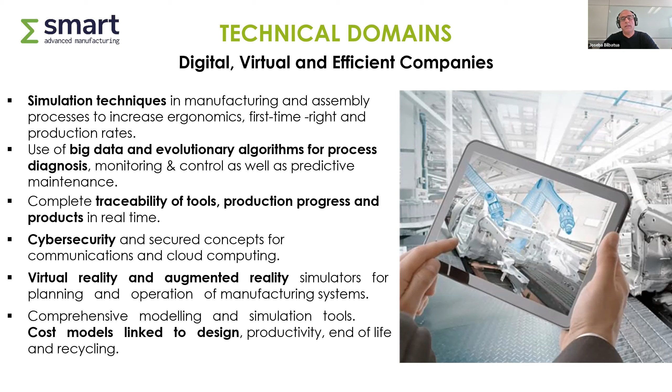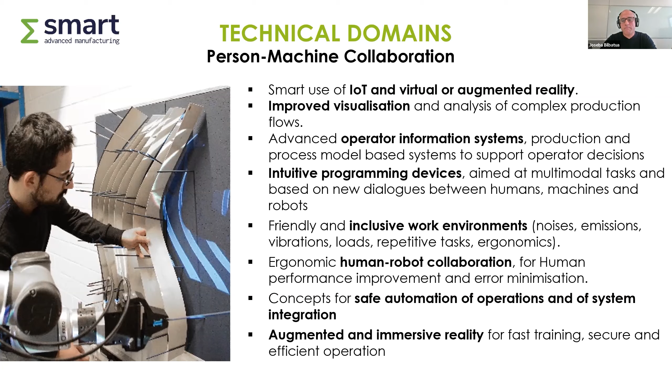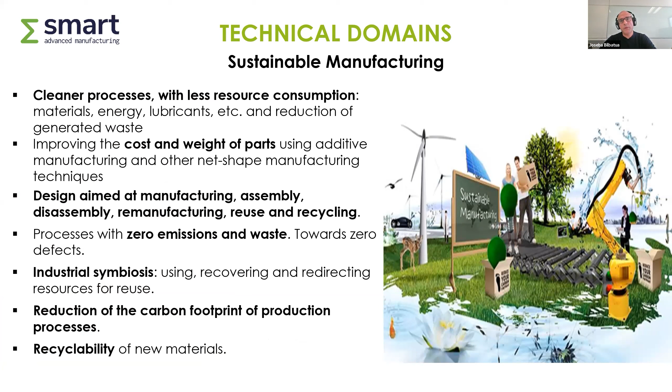A fifth domain is sustainable manufacturing. Originally we thought of this domain for manufacturing technologies that could contribute to less energy and raw material consumption during machining and manufacturing. But we would also like to include in this sustainable manufacturing domain all technologies around reusing, recycling, remanufacturing - the circular economy applied to the manufacturing scenario could also be included here.

Finally, the sixth domain, we call it customer-based manufacturing. In this domain we include all those relationships and interactions that could come from the different stakeholders of the value chain, from the raw material provider up to the end user, the technology suppliers, and all those business opportunities that could arise from this collaboration along the value chain. So these are our six technical domains.

Of course the SMART projects could deal with several domains at the same time - we are not asking projects to focus on just a specific domain. But as you will have seen, we have defined the technical domains quite wide and broad in order to follow this bottom-up approach and to be able to respond to the needs and priorities of the companies.

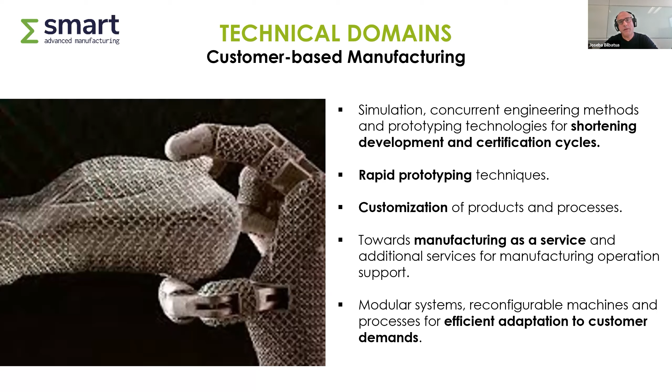Finally, the budget in the consortia has to be balanced between the participants and also the countries involved in the consortia. That means, of course, we can have different participation of partners and countries in the budget, but this has to more or less well justify the activity and participation of the different partners.

In SMART we are following a two-stage approach for submitting proposals. As you know, we are still in the project outline, which is the first stage. I have to say that this is not a go, no-go phase, so all the projects will be evaluated in a positive way. The idea is that our feedback will be recommendations and suggestions on how the proposal can be more successful in the full project proposal stage.

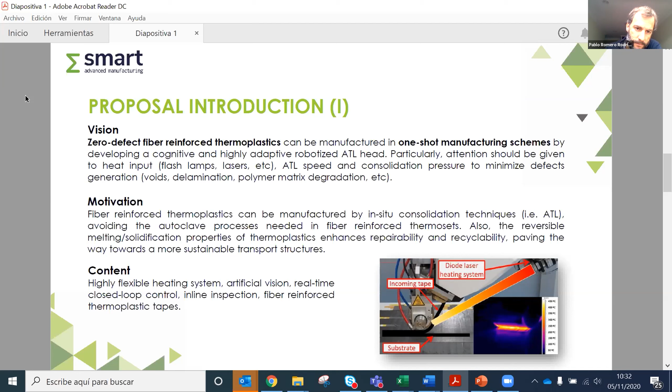Regarding outputs, there is not a lot of technology for online inspection of composites during this manufacturing process. So we see here a good outcome related to ultrasonic detection or other technology.

Another outcome is zero defect manufacturing by in situ consolidation. I mean, this is the title of the project, but it is not achieved currently, so we envisage this outcome as a potential result.

And the increase of manufacturing rate as well, since we are going to come up with more flexible ATL manufacturing processes, we will have more design space and increased manufacturing rate.

Regarding impacts, I will highlight this flexibility to consolidate thermoplastics in the transport sector, to introduce new complex parts in this sector and others, and also enhance overall the possibilities of lightweight materials in different sectors.

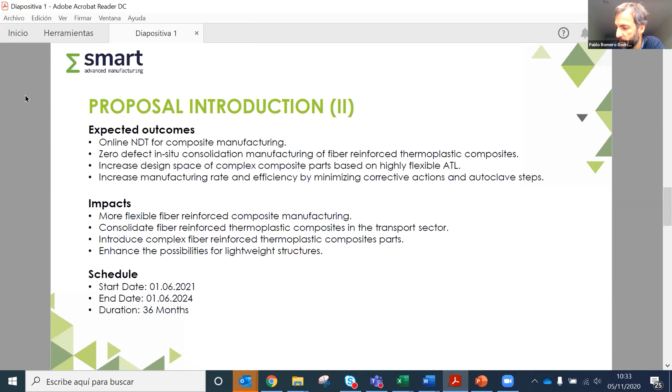This is a 36-month project, and talking about partners, we are mostly focusing on ATL head manufacturers and fiber reinforced composite tape manufacturers. Machine vision we also have at AIMEN, but we are open to collaborate here as well.

And that's my contact point. I'm open to talk to you, and thank you very much for this opportunity.

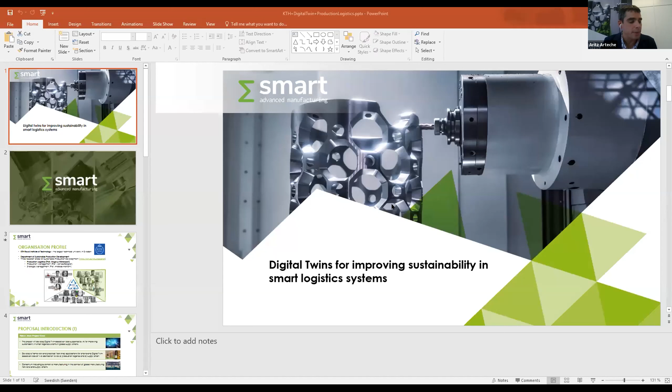Good morning, thanks. Hopefully you get to see my screen. Yeah, we do see your screen. Great, thank you.

My name is Eric Flores. I am a researcher at the Royal Institute of Technology in Sweden. And I am very grateful to have this opportunity to present our idea, which we've named Digital Twins for Improving Sustainability in Smart Logistics Systems.

Who are we? The Royal Institute of Technology is Sweden's largest technical university. I work for the Department of Sustainable Production Development, and we are focused on three research areas, of which I am a member of production logistics, led by Professor Magnus Wiktorsson. The core of our work really is helping manufacturing companies improve logistics competitiveness through smart technologies, and we do so through a sustainable perspective.

Which leads us to the proposal and the vision of our project. In this project, we wish to help manufacturing companies of the automotive industry develop a digital twin. In particular, what we are targeting is services that can benefit operators, logistics managers, and factory management.

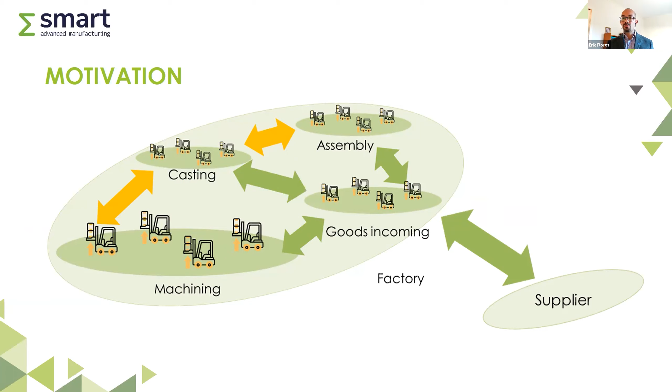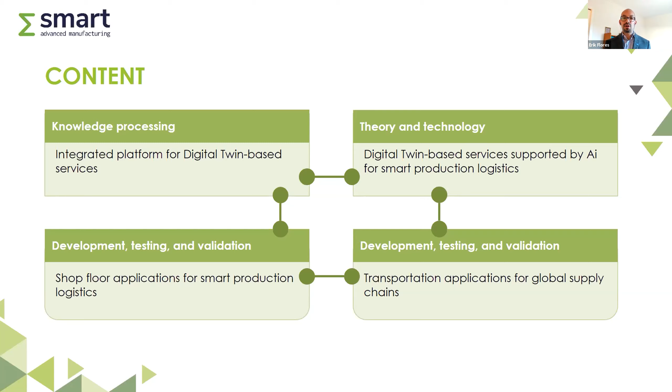This is a very broad scope of what we are trying to achieve in providing a digital twin powered by AI that contributes to how logistics is handled inside the factory and its interface. As part of this project, we envision developing, testing, and validating at the shop floor application, but also contributing new developments of technology. We have outlined certain outcomes that can benefit manufacturing companies and IT companies. I would like to highlight that, as opposed to what is currently being done—providing solutions to the customer end—we are looking towards the factory itself.

As far as market impact goes, the KPIs that can contribute to factory improvement include energy efficiency, makespan, and delivery of products. But in addition to that, we're also targeting social, environmental, and economic aspects of sustainability.

We're aiming for a 3-year project in which we collaborate with all partners. This is fundamental for us. Currently, we have partners in Sweden in automotive and AI, and we also have partners in Korea. But we wish to extend our network, particularly if you're from the automotive sector, a supplier, or an IT company. I thank you all for your time, and I am very grateful to hear more from you.

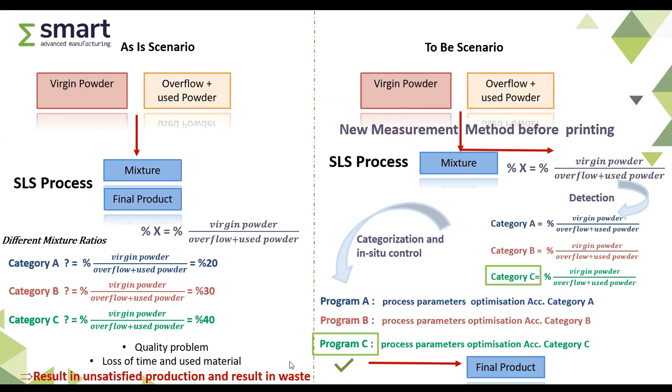So with these systems, we are expecting quality problems can decrease, resulting in saving time, production time, energy, and printed material powder can also be used well. Then scraps can be decreased.

Also, because non-used material can be a problem for environmental issues, with this process improvement we can achieve a good environmental solution. Optimum process parameters can also help for serial production spare part applications.

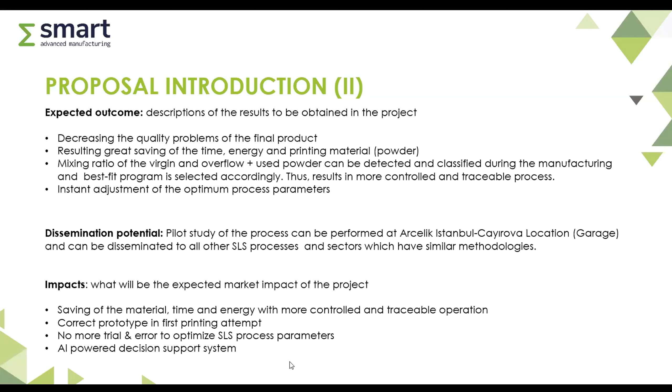Pilot study of the process can be performed at Arçelik facilities. We are located in Istanbul, Çayırova location. In our garage laboratory, we have two different SLS polymer machines. We are also experienced with FDM and other printing technologies. So with this project, we can modify our machine accordingly and make some trials.

So we're searching for partners with the ability to understand material property classification and understand the good levels of the material. Also, the partners should provide sensor-based or camera-based systems to understand the best fitted parameters and situation of the material. Then, communication of the machine with this sensor-based or visual control system, and this integration with the machine and parameter selection manual system, can be explored. With this aim, we need partners too.

Thank you, Ibrahim. We had a little bit of noise in the background, but finally, I think the presentation was good. And finally, we're moving to Ireland with the IMR team. Fergus Culligan and John Mullaney are going to introduce us two project ideas that they have prepared.

Good morning, Fergus. Good morning, John. The floor is yours for you to begin. Morning, Aritz. Thank you for that.

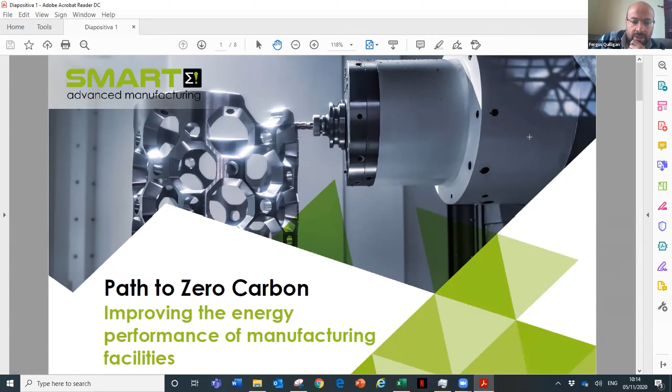So the project I'm talking about here today is A Path to Zero Carbon. It's about improving the energy performance of manufacturing facilities. About Irish Manufacturing Research, we're a not-for-profit research and technology organisation to help Irish manufacturing innovate. We're about 80 people, mostly researchers working in data analytics, industrial Internet of Things, sustainable manufacturing, intelligent buildings, automation, advanced control, circular economy, software engineering, amongst other things.

So the proposal I'm proposing here today is around the application of renewable technology and AI to support the demonstration of a zero carbon building. The motivation of this is to develop intelligent energy services to demonstrate reduced carbon for factories, especially legacy factories. The content of this is around the application of AI to monitor and enable advanced real-time optimization through integration of intelligent metering and control systems.

It's also to include research into federated machine learning and fog compute architectures that can integrate energy and natural resource consumption and response strategies into productivity, consumption, and behavior for factories. It's also about developing energy-aware buildings by jointly optimizing consumption costs, occupancy comfort, and CO2 reductions, and looking at connecting digital technologies to integrate distributed renewable energy sources with bidirectional charging functionalities to enable neighborhood optimized storage, including management systems for optimal integration, flexibility, and interoperability with the grid itself. The expected outcome of this is the development of an advanced analytics and AI platform to optimize factory performance for energy.

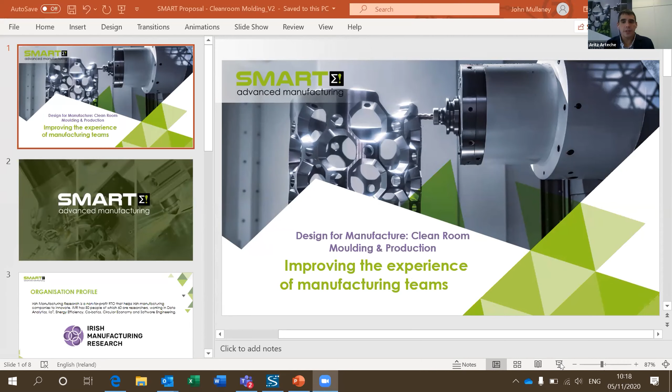Okay, good morning everybody. Can you see my screen? Yes, but it's not full screen. Okay, we'll be in a second. Now, it is right now. Yeah, thank you, okay thank you.

Good morning everybody, and thanks for a few moments to share this project with you, which has got to do with the design for manufacture for products in a clean room environment connected with molding, with an injection molding operation.

So Fergus has introduced who we are. Just to minimize a couple of things here, sorry.

So we are working with a highly experienced tooling and injection molding company, which has been in operation for the last 64 years and has a very broad depth of experience in creating molding tools and also in molding a vast range of plastic related products.

And right now they are expanding into a new clean room facility and into a whole range of product services for that type of facility. That does create an opportunity for us to cooperate with SMEs in producing matched products and production environments.

Thank you. Yes, so I wanted to remind you that these project ideas that you heard about are available in our projects looking for partners section of the website. You can see there how to reach it. You have to go to submit your proposal, and the last section is projects looking for partners.

All these project ideas are available, but there are also more project ideas that might be of your interest, and we are receiving more. As we were having this session, I already received two more project ideas. For those attending the meeting and not as speakers, if you have any project ideas, you can send them to us and we will upload them to share with all our audience.

Remember that the contact information is available in the last slide of those presentations. But the main aim of this event was to provide the means to have bilateral meetings between the speakers or the different attendees to the event. We have almost 170 people registered, and remember that you can have bilateral meetings between you using our B2Match tool.

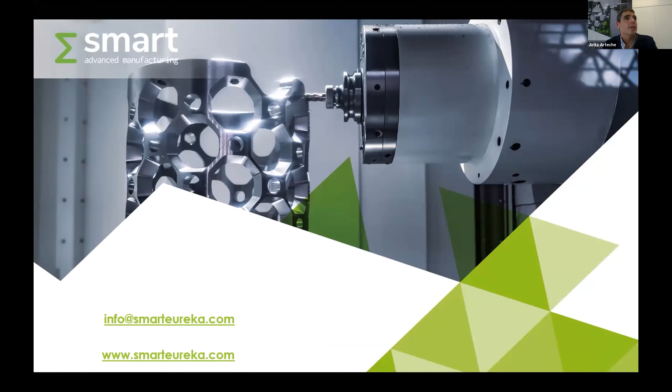One last remark before closing this event: do not forget to contact your national funding agencies, because they will give you hints on how to form the consortium. The funding rules are very different from one country to another, and they might give you advice on how to form the consortium in your country.

I'm not going to go into detail, but there are some countries that won't fund research centers or universities unless they are subcontracted. Other ones will give direct funding to those entities. So please contact your national funding agencies for that, and as Joseba said before, to see if the topic you are focusing on is one of the national priorities that they would fund.

Last but not least, you can also contact us for any doubt you may have in all the process, first of all in the PO phase, and afterwards in the FPP phase. You've got our contact information there through our email, info@smarteureka.com, and there are also many different possibilities to contact us through our website.

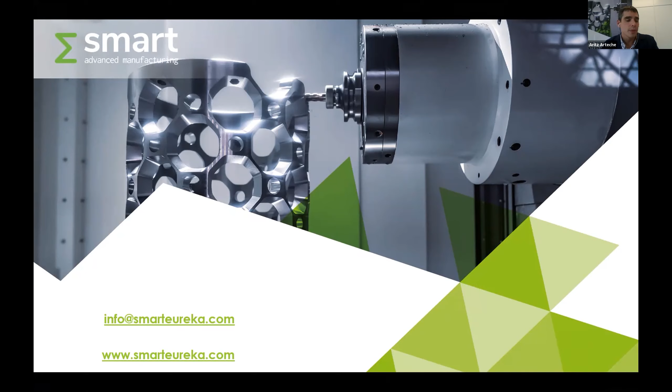It's 11:28 by my watch, and we almost nailed it. Thank you everyone for being there.

We will send you the presentations that we had today, the one that Joseba used to explain what SMART is and how the fourth call is going to work, and this one explaining how to reach the projects looking for partners section, and how to ask for B2B meetings.